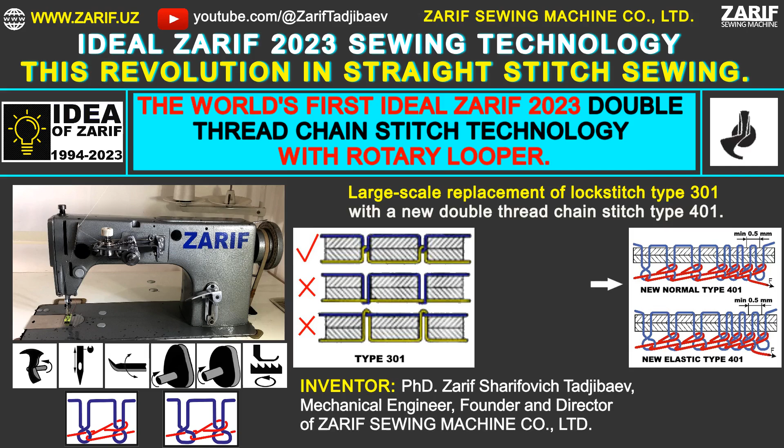This is a fundraising campaign to bring to market the Ideal Zarif 2023 year sewing technology, a revolution in straight stitch sewing. In 1994, we revolutionized sewing technology with the creation of the Zarif double thread chain stitch technology using a rotary looper. This breakthrough was officially recognized in 2000 with US patent number 6095069. It has taken us almost 26 years to perfect this innovative technology, making it the world's first ideal solution for sewing straight stitches. To achieve this, we first developed a prototype Zarif sewing machine based on our new technology in 1997.

We modified an industrial lockstitch sewing machine, Class 1022, from Orsha, Belarus, to carry out our initial trials. Through extensive testing, we identified areas for improvement and gradually improved the machine by applying our expertise. Finally, in 2023, we successfully created the world's first Ideal Zarif technology for straight stitch sewing.

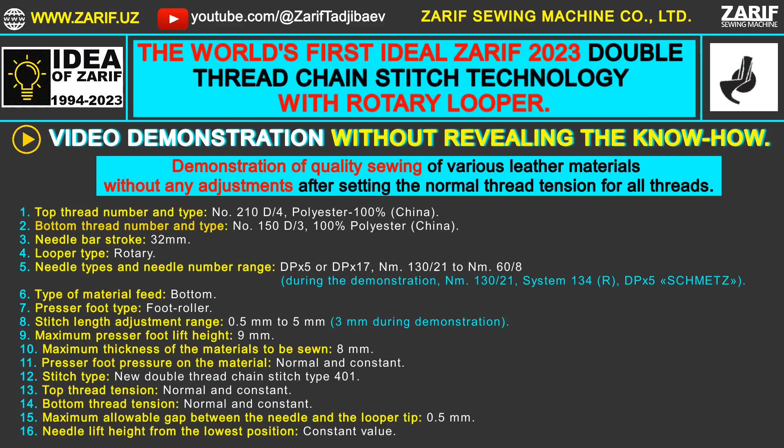Video demonstration without revealing the know-how. Demonstration of quality sewing of various leather materials, without any adjustments after setting the normal thread tension for all threads. Our prototype of the innovative Zarif double thread chain stitch sewing machine works on the basis of our Ideal Zarif 2023 year double thread chain stitch technology with a rotary looper.

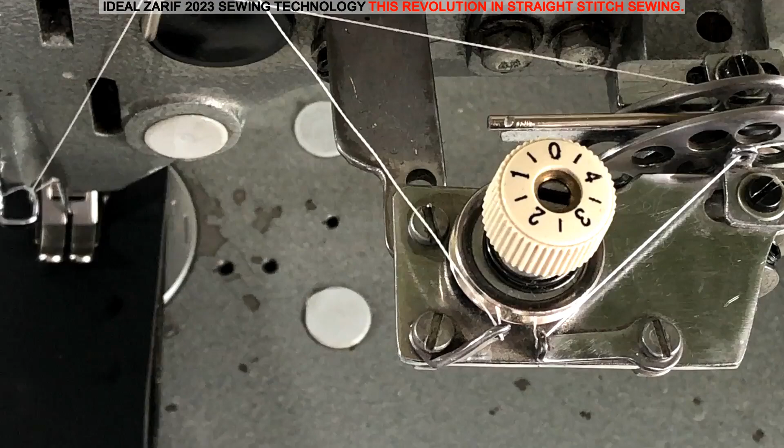For the sewing demonstration, we will be using sewing threads made in China. The main requirement is the absence of knots, as knots disrupt the stitch formation process since they cannot pass through the eye of the needle. During sewing, the top thread tensioner nut and the bottom thread tensioner nut, not shown, remain in a fixed position, ensuring the normal thread tension, neither too loose nor too tight.

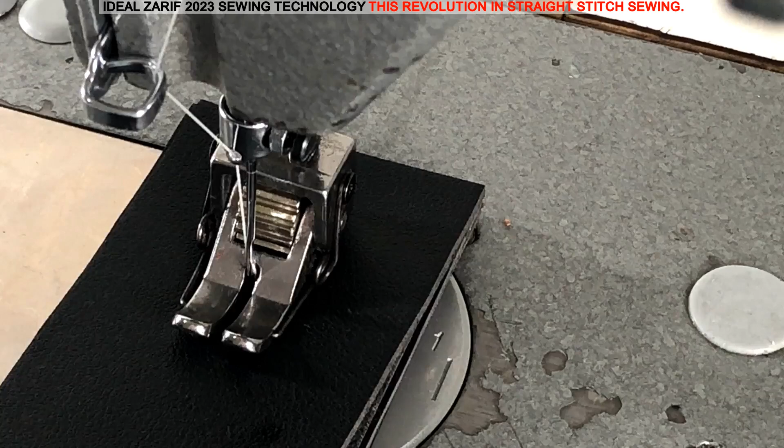In our Ideal Zarif 2023 year double thread chain stitch technology, the needle is not involved in pre-tightening the top thread loop from the previous stitch. As a result, for the first time ever, a double thread chain stitch sewing machine uses a needle with one long groove.

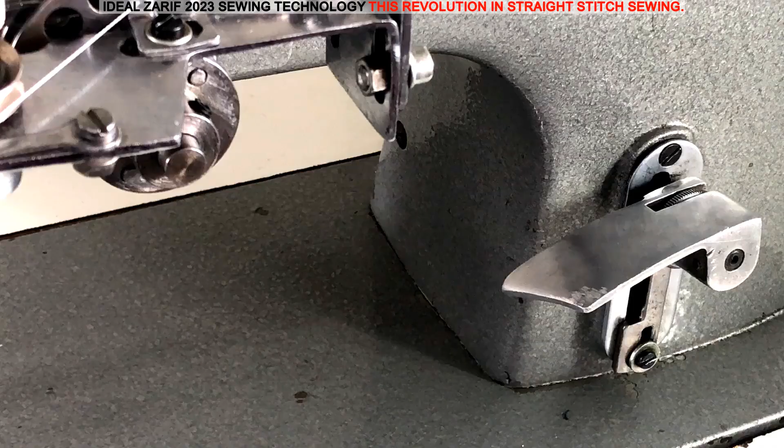This design offers greater resistance to bending compared to the double groove needle used in existing double thread and multi-thread chain stitch technologies. Thanks to our Ideal Zarif 2023 year sewing technology, it has become possible for the first time in the world to reduce the length of the double thread chain stitch to 0.5 mm. This allows for a more secure tacking of the chain stitch seam end and prevents unraveling due to condensed stitches at a stitch length of 0.5 mm.

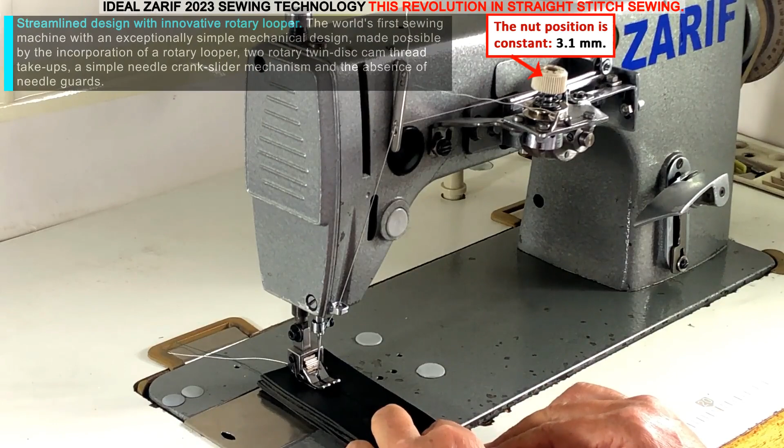Streamlined design with innovative rotary looper. The world's first sewing machine with an exceptionally simple mechanical design, made possible by the incorporation of a rotary looper, 2 rotary twin-disc cam thread take-ups, a simple needle crank slider mechanism and the absence of needle guards.

Revolutionary chain stitch look. This pioneering double-thread chain stitch sewing machine produces a new double-thread chain stitch type 401 in which the loops of the top and bottom threads are rotated 180 degrees. This innovative design makes the underside of the chain stitch look like a thick thread running along the seam, rather than a chain of threads, due to the use of a rotary looper.

One long groove needle for maximum strength. For the first time, a double thread chain stitch sewing machine uses a needle with one long groove to produce a double thread chain stitch type 401, which offers greater flexural strength than a needle with two long grooves used in existing double thread and multi-thread chain stitch technologies.

Advanced capabilities for sewing thick materials. This groundbreaking sewing machine can sew materials up to 8 mm thick with a short needle bar stroke of 32 mm, thanks to our know-how.

Breakthrough in needle stability for different materials. This revolutionary sewing machine can sew different materials without needle breakage and needle point deformation, achieved by the use of a rotary looper and a needle plate with a slot for the needle, coupled with the absence of needle guards.

Elimination of skipped stitches and unraveling. This pioneering sewing machine, thanks to our innovative design, can sew materials without a single skipped stitch, which is critical for chain stitch seams, as all types of chain stitch seams are prone to unraveling, both at the end of the seam if not securely tacked, and from the skipped stitch back to the beginning of the seam.

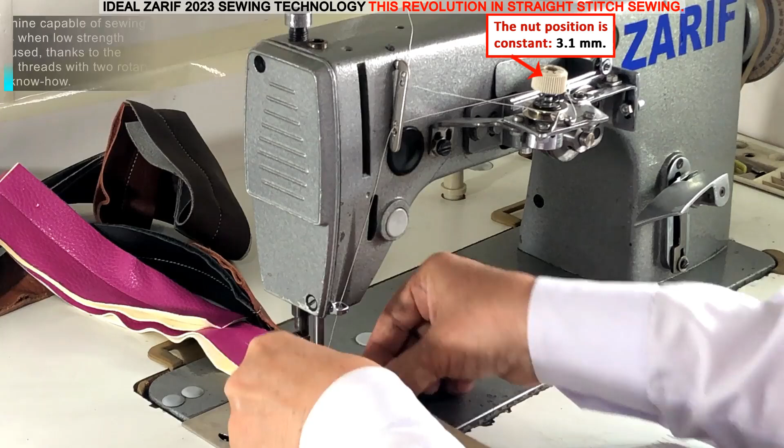No thread breaks. The first sewing machine capable of sewing through materials without thread breaks when low-strength threads and threads with knots are not used, thanks to the smooth tightening of the top and bottom threads with two rotary twin-disc cam thread take-ups and our know-how.

Easy changeover to different needle sizes. The first sewing machine to increase the maximum distance between the needle and the looper tip to 0.5 mm, making it easy to change from one needle size to another, from number 130 to #60, without having to adjust the looper in relation to the needle.

Secure tacking of the chain stitch seam end. The world's first double thread chain stitch sewing machine, thanks to our know-how, makes it possible to reduce the length of the chain stitch to 0.5 mm, thus making the end of the chain stitch seam more secure against unraveling by condensing the stitches with a stitch length of 0.5 mm.

High-quality chain stitch seams with no adjustments. For the first time in the world, we've used our know-how to achieve high-quality chain stitch seams without skipped stitches. All stitches are ideally tightened, regardless of the thickness, stiffness, or density of the material, simply by setting the normal thread tension for all threads, no further adjustments required.

A new look for the chain stitch underside. For the first time ever, the underside of a chain stitch seam looks like a thick thread running along the seam instead of a chain. This breakthrough is made possible by our new double thread chain stitch type 401, where the top thread and bottom thread loops are rotated 180 degrees.

Quality joining of different materials without adjustments. For the first time, our advanced technology allows quality joining of materials of different thicknesses, densities, and stiffnesses with chain stitch without any adjustments during the sewing process, simply by setting the normal thread tension for all threads, thanks to our know-how.

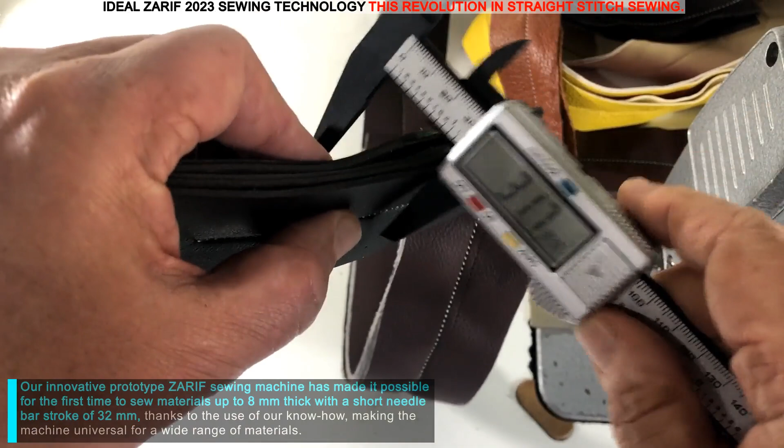Our innovative prototype Zarif sewing machine has made it possible for the first time to sew materials up to 8 mm thick with a short needle bar stroke of 32 mm, thanks to the use of our know-how, making the machine universal for a wide range of materials. This refers to the thickness of various cross-linked materials consisting of 2 or more layers in a compressed state.

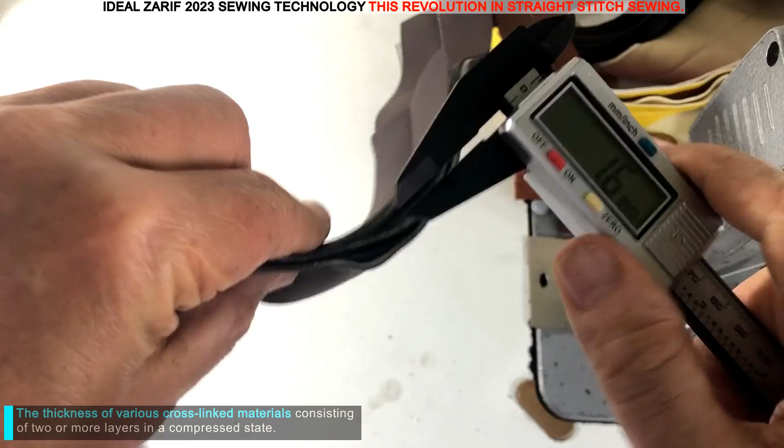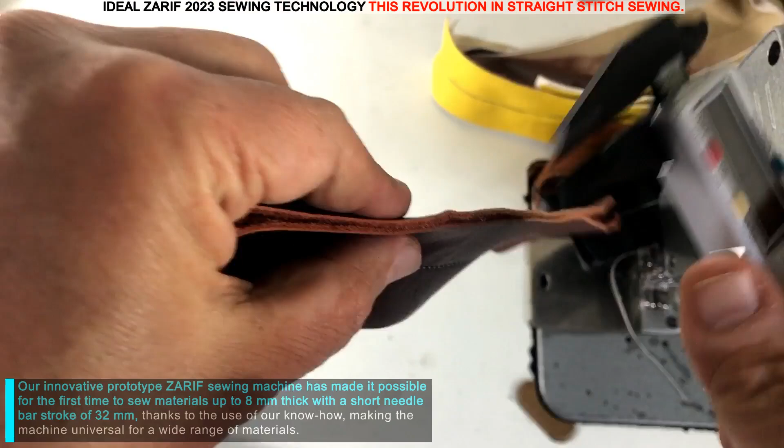Our innovative prototype Zarif sewing machine has made it possible for the first time to sew materials up to 8 mm thick with a short needle bar stroke of 32 mm, thanks to the use of our know-how, making the machine universal for a wide range of materials. This refers to the thickness of various cross-linked materials consisting of 2 or more layers in a compressed state.

Our innovative prototype Zarif sewing machine has made it possible for the first time to sew materials up to 8 mm thick with a short needle bar stroke of 32 mm, thanks to the use of our know-how, making the machine universal for a wide range of materials. This refers to the thickness of various cross-linked materials consisting of 2 or more layers in a compressed state.

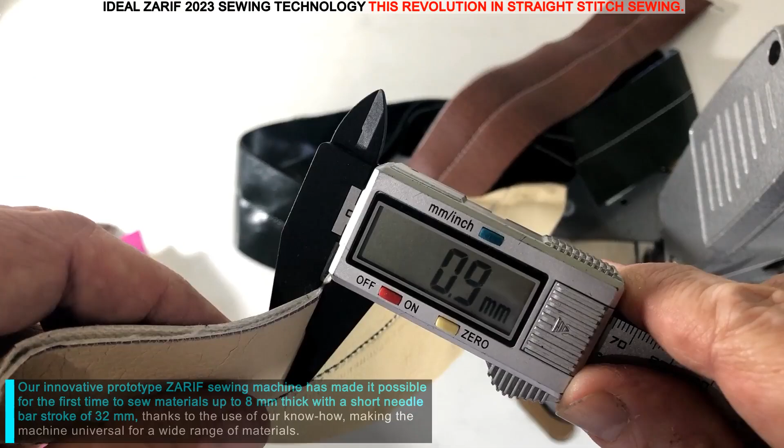Our innovative prototype Zarif sewing machine has made it possible for the first time to sew materials up to 8 mm thick with a short needle bar stroke of 32 mm, thanks to the use of our know-how, making the machine universal for a wide range of materials. This refers to the thickness of various cross-linked materials consisting of 2 or more layers in a compressed state.

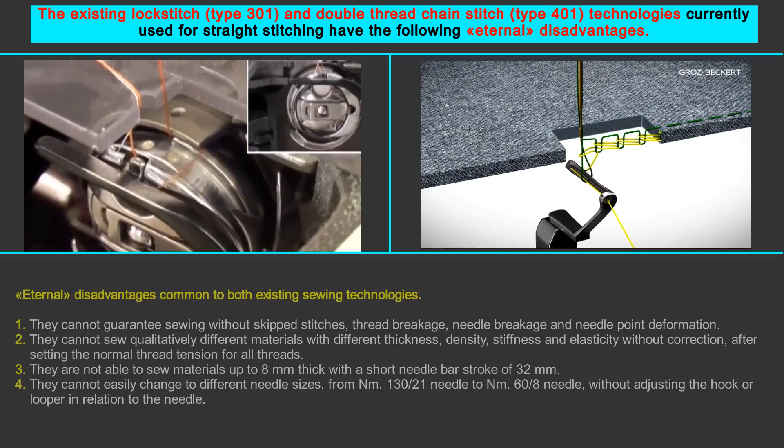The existing lock stitch, type 301, and double thread chain stitch, type 401, technologies currently used for straight stitching have the following eternal disadvantages, common to both existing sewing technologies.

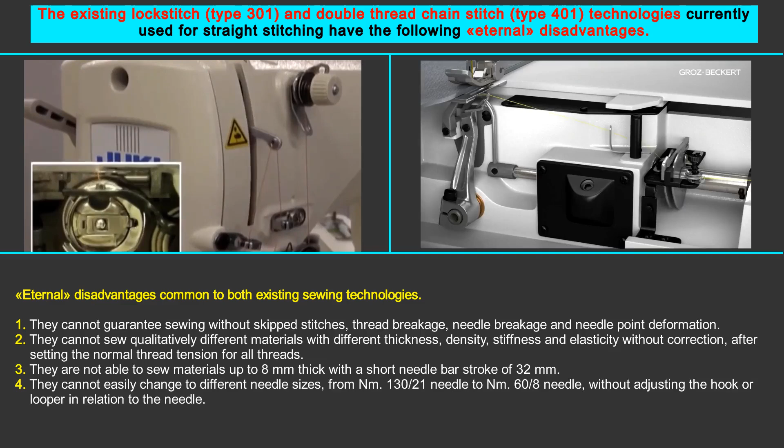They cannot guarantee sewing without skipped stitches, thread breakage, needle breakage and needle point deformation. They cannot sew qualitatively different materials with different thickness, density, stiffness and elasticity without correction, after setting normal thread tension for all threads. They are not able to sew materials up to 8 mm thick with a short needle bar stroke of 32 mm.

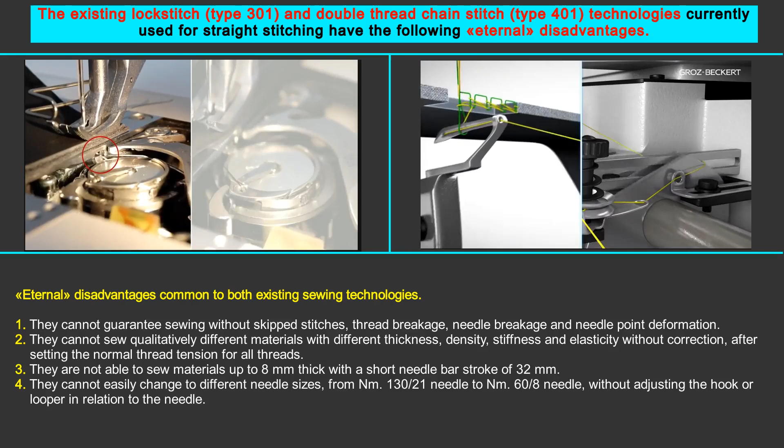They cannot easily change to different needle sizes, from number 130 needle to number 60 needle, without adjusting the hook or looper in relation to the needle.

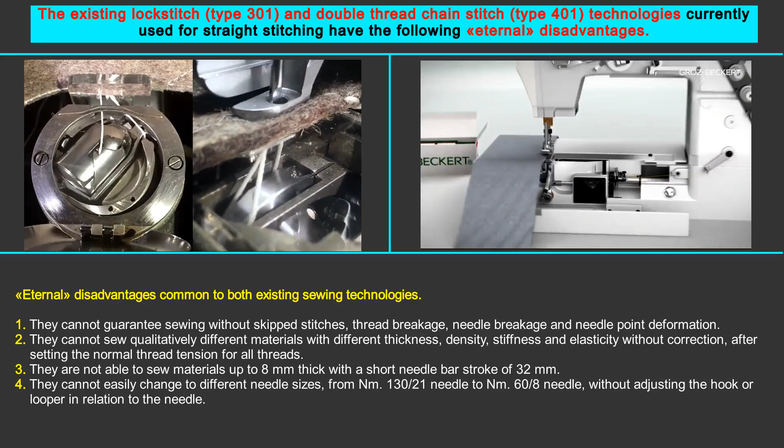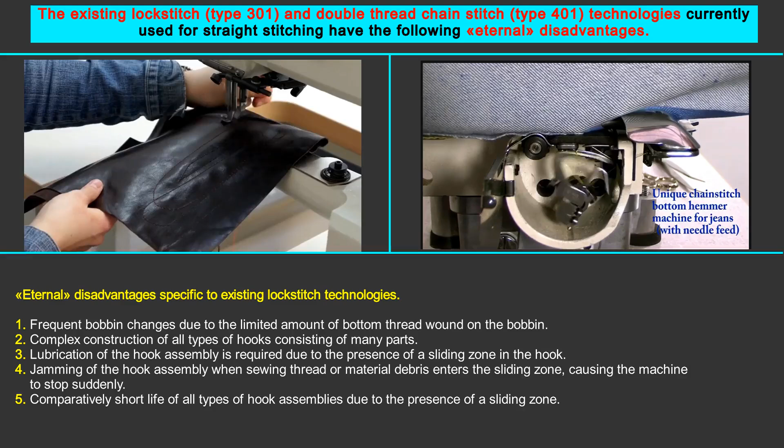Eternal disadvantages specific to existing lockstitch technologies: frequent bobbin changes due to the limited amount of bottom thread wound on the bobbin, and complex construction of all types of hooks consisting of many parts.

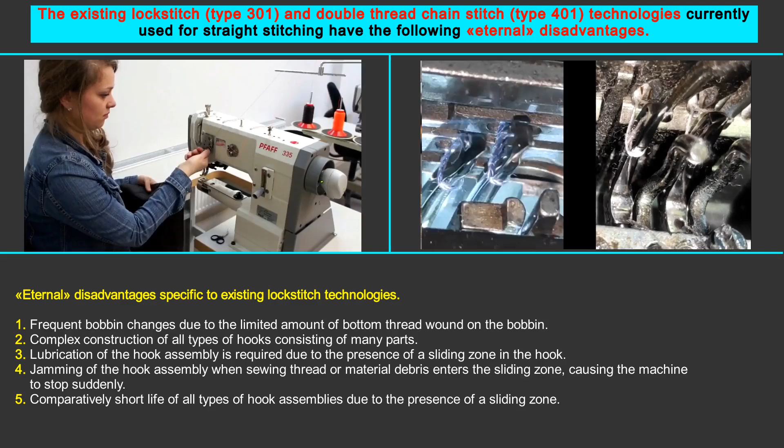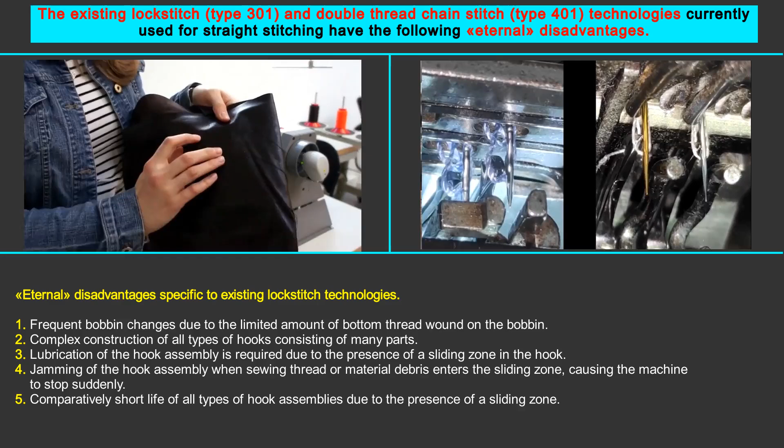Lubrication of the hook assembly is required due to the presence of a sliding zone in the hook. Jamming of the hook assembly occurs when sewing thread or material debris enters the sliding zone, causing the machine to stop suddenly. There is also a comparatively short life of all types of hook assemblies due to the presence of a sliding zone.

Eternal disadvantages specific to existing double thread chain stitch technologies, which use 3 types of looper with an eyelet at the top for bottom thread insertion.

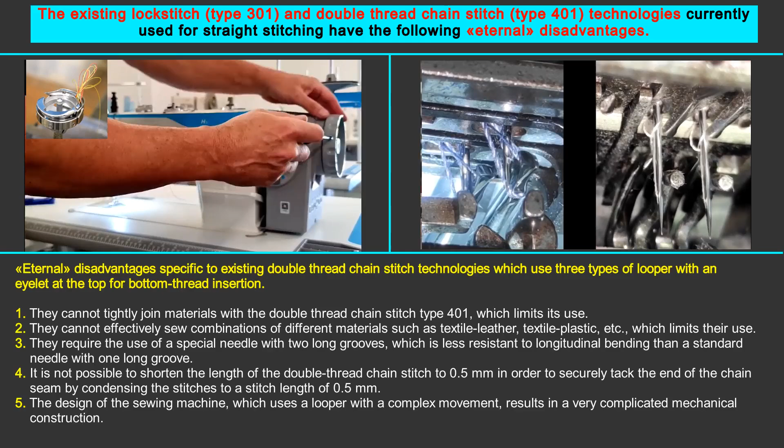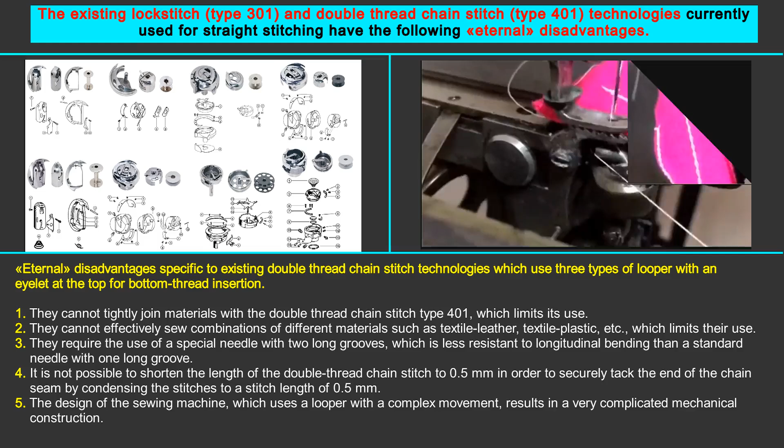They cannot tightly join materials with the double thread chain stitch type 401, which limits its use. They also cannot effectively sew combinations of different materials such as textile-leather, textile-plastic, etc., which limits their use.

They require the use of a special needle with 2 long grooves, which is less resistant to longitudinal bending than a standard needle with 1 long groove.

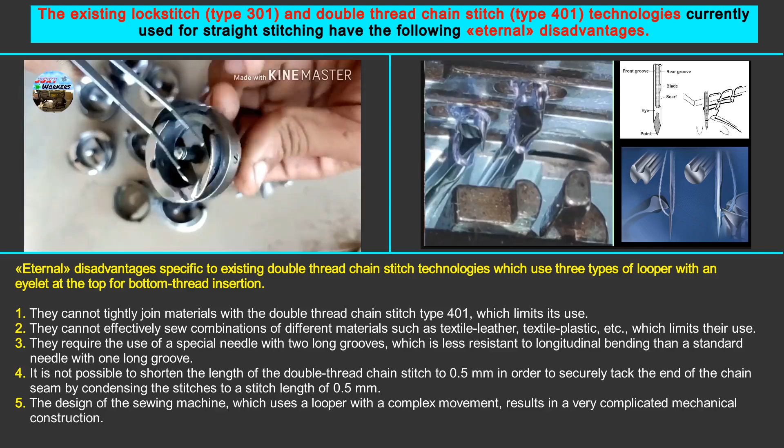It is not possible to shorten the length of the double thread chain stitch to 0.5 mm in order to securely tack the end of the chain seam by condensing the stitches to a stitch length of 0.5 mm.

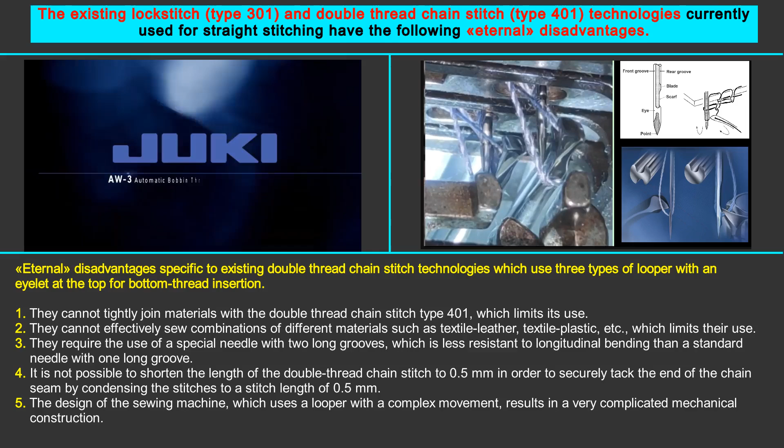The design of the sewing machine, which uses a looper with a complex movement, results in a very complicated mechanical construction.

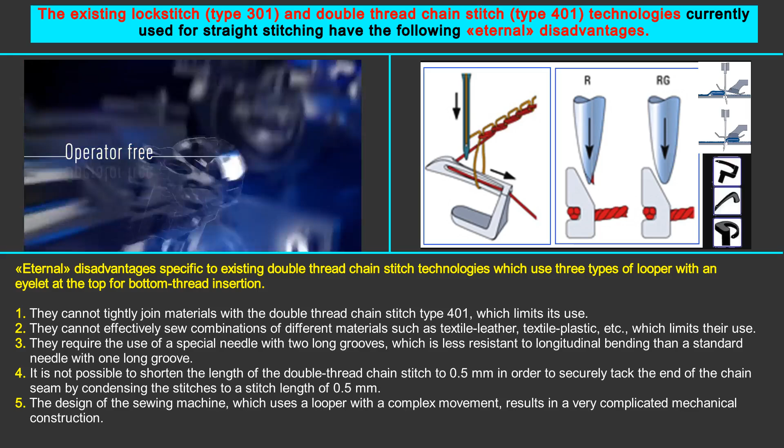Our ideal Zarif 2023 year double thread chain stitch technology has revolutionized sewing machine design and straight stitch sewing. For the first time, a rotary looper is used to form a double thread chain stitch, resulting in the world's first new double thread chain stitch type 401, where the top and bottom thread loops are rotated 180 degrees.

For the first time, an ordinary needle with a single long groove is used to form a double thread chain stitch, as the needle does not participate in the pre-tightening of the top thread loop placed in the previous stitch.

For the first time, materials up to 8 mm thick can be sewn with a needle bar stroke of 32 mm. For the first time, it is possible to sew materials of different thickness, density, stiffness and elasticity without any adjustments, by setting the normal tension for all threads.

For the first time, it is possible to sew without skipped stitches, thread breakage and needle point deformation, provided the thread is free of knots and the needle size matches the material being sewn.

For the first time, using our know-how, it is possible to tightly pull the top thread loop in a stitch to achieve a dense material join, or to loosely pull the top thread loop in a stitch to get smooth seams on light materials and elastic seams in stretchable materials, without adjusting normal thread tension.

For the first time, the maximum allowable gap between the needle and the tip of the looper has been increased to 0.5 mm, allowing an easy transition from a number 130 needle to a number 60 needle without adjusting the looper relative to the needle.

For the first time, high stitch formation reliability has been achieved without the use of needle guards.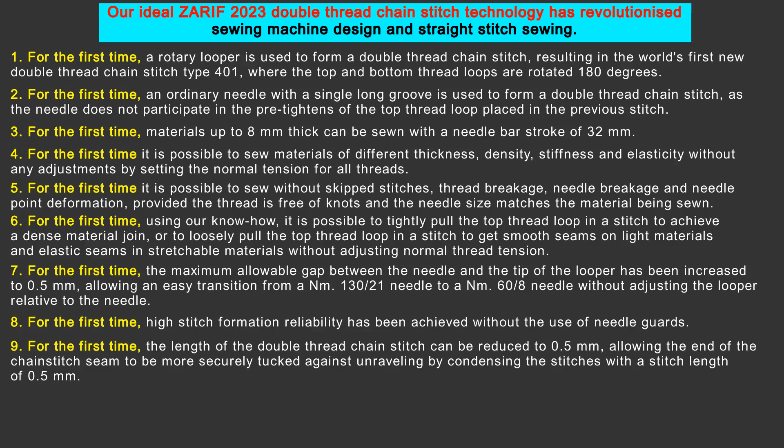For the first time, the length of the double thread chain stitch can be reduced to 0.5 mm, allowing the end of the chain stitch seam to be more securely tucked against unraveling by condensing the stitches with a stitch length of 0.5 mm. For the first time, it is possible to develop different types of sewing machines, with different types of platforms and different types of material feed.

This is achieved with a very simple mechanical design that operates with high reliability and long service life.

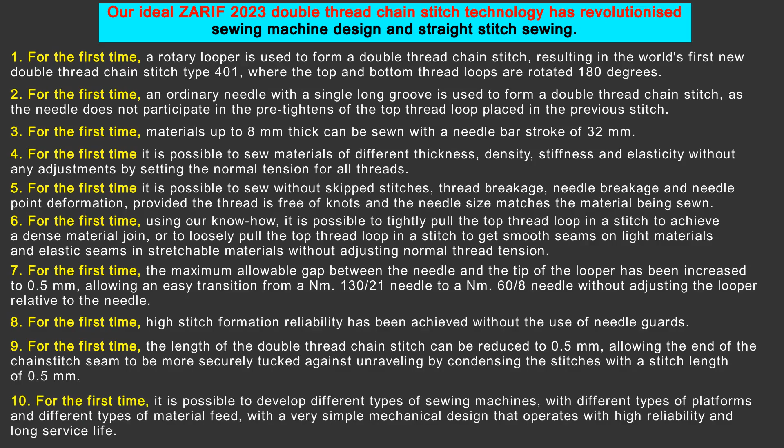History of Zarif double thread chain stitch technology with rotary looper: in 1994 we came up with the idea of creating a double thread chain stitch type 401 using a rotary looper. We applied for a patent for this new Zarif double thread chain stitch technology, and in 2000, US patent number 6095069 was granted.

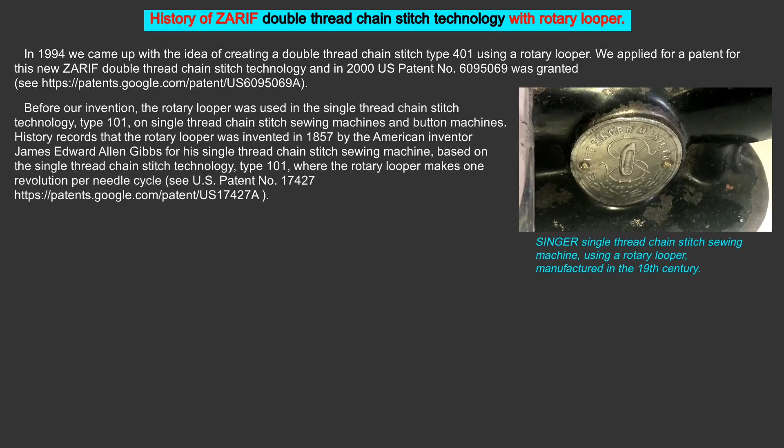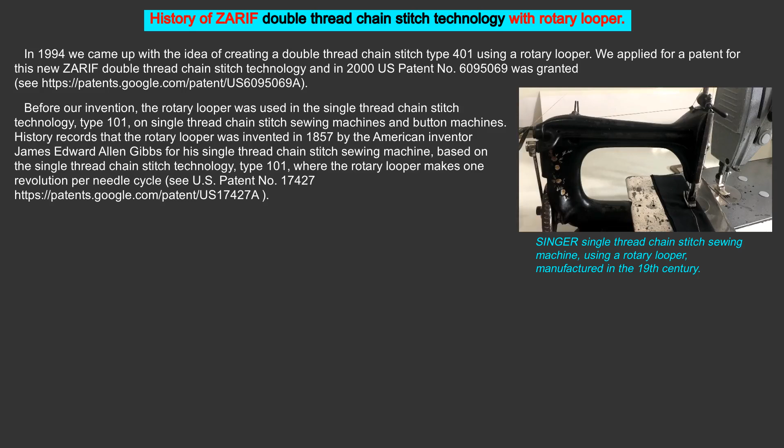Before our invention, the rotary looper was used in the single thread chain stitch technology, type 101, on single thread chain stitch sewing machines and button machines. History records that the rotary looper was invented in 1857 by American inventor James Edward Allen Gibbs for his single thread chain stitch sewing machine, based on the single thread chain stitch technology, type 101, where the rotary looper makes 1 revolution per needle cycle. See US patent number 17427.

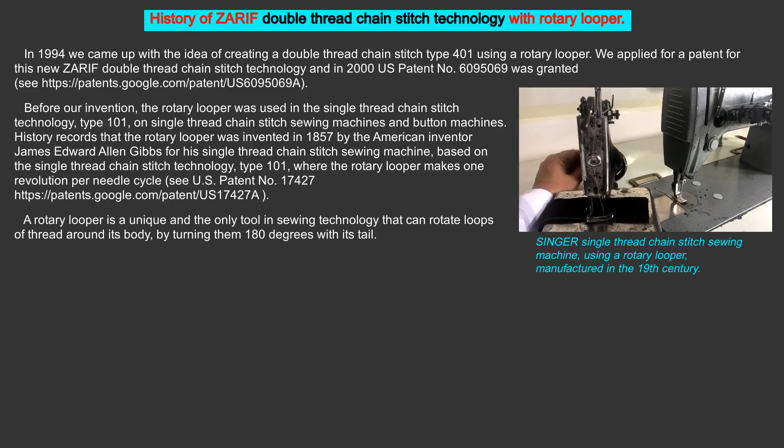A rotary looper is a unique and the only tool in sewing technology that can rotate loops of thread around its body by turning them 180 degrees with its tail. As is known, the rotary looper is made in one piece and has 3 zones: the head zone with a front tip to catch the thread and a rear tip to release the thread loop from the body of the looper, the tail zone for rotating the thread loop through 180 degrees, and the shaft zone for attaching the looper to the machine.

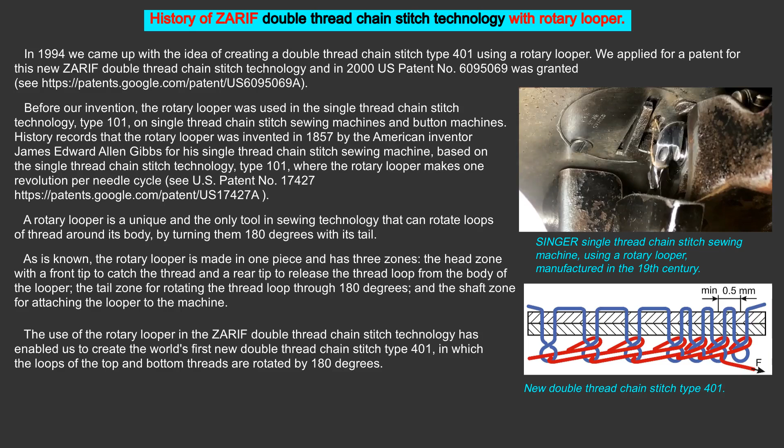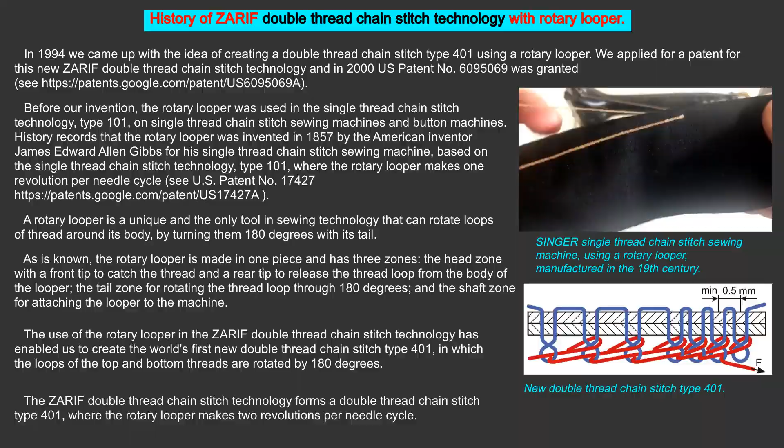The use of the rotary looper in the Zarif double thread chain stitch technology has enabled us to create the world's first new double thread chain stitch type 401, in which the loops of the top and bottom threads are rotated by 180 degrees. The Zarif double thread chain stitch technology forms a double thread chain stitch type 401, where the rotary looper makes 2 revolutions per needle cycle. Zarif double thread chain stitch technology with rotary looper, invented by us in 1994, see US patent number 6095069.

In the Zarif double thread chain stitch technology, the top thread is fed to the looper by a needle with a vertical reciprocating motion, as is usually done. To feed the bottom thread to the looper, a bottom thread pusher is used, which makes oscillating movements in the horizontal plane. Since the rotary looper can loop thread around its body in the form of a loop,

once the bottom thread, fed by the bottom thread pusher, is caught by the front tip of the looper, the top thread loop leaves the looper body and, as it tightens, forms a loop from the bottom thread which the looper can now wrap around its body. As the rotary looper only uses a small length of the thread loops and the thread loops are released from the rear tip of the looper, the thread loops can be tightened very smoothly.

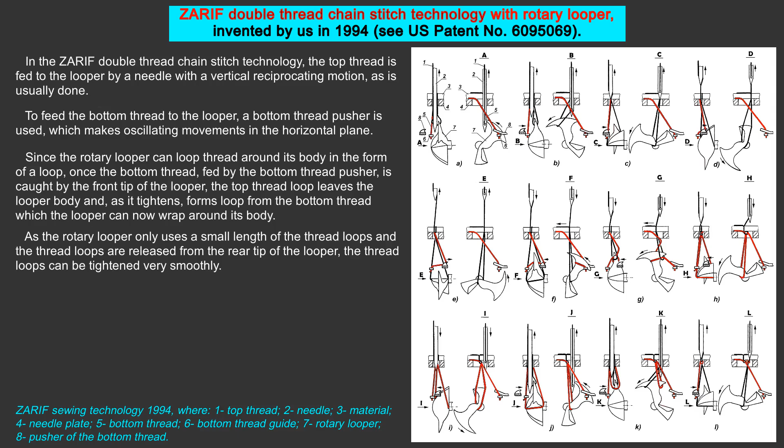Therefore, the Zarif double thread chain stitch technology uses 2 rotary twin disc cam thread take-ups to feed and tighten both the top and bottom threads, with each thread being controlled separately.

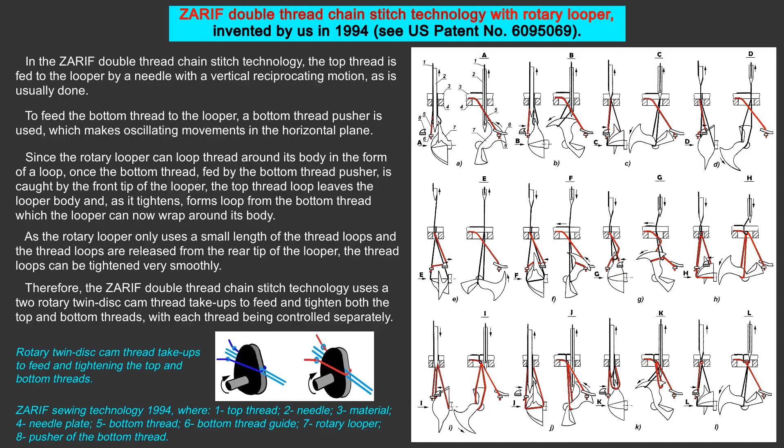History of the prototype development of the Zarif sewing machine based on Zarif double thread chain stitch technology with a rotary looper. In 1997, we decided to build a prototype sewing machine to test our new Zarif double thread chain stitch technology with a rotary looper, which we had invented in 1994. We chose a Class 1022 lockstitch industrial sewing machine from the Belarusian company Orsha because it was widely used in Uzbekistan at the time and was relatively affordable. The machine had a needle bar stroke of 32 mm and was designed to sew fabrics of medium thickness.

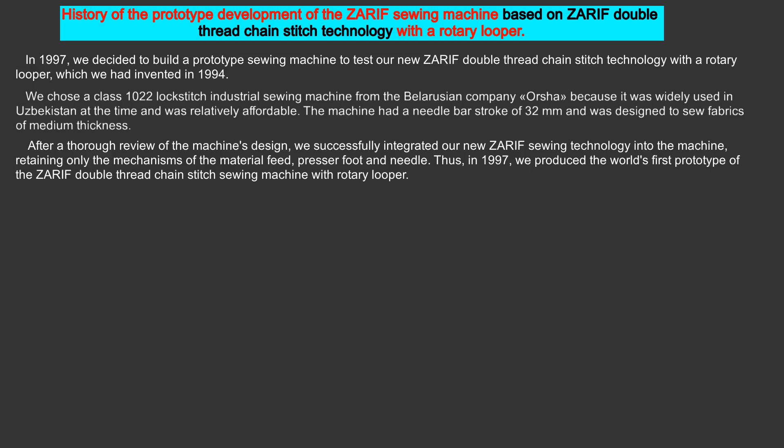After a thorough review of the machine's design, we successfully integrated our new Zarif sewing technology into the machine, retaining only the mechanisms of the material feed, presser foot, and needle. Thus, in 1997, we produced the world's first prototype of the Zarif double thread chain stitch sewing machine with rotary looper. Trials on the prototype Zarif sewing machine allowed us to identify some of the shortcomings of our new Zarif double thread chain stitch technology developed in 1994.

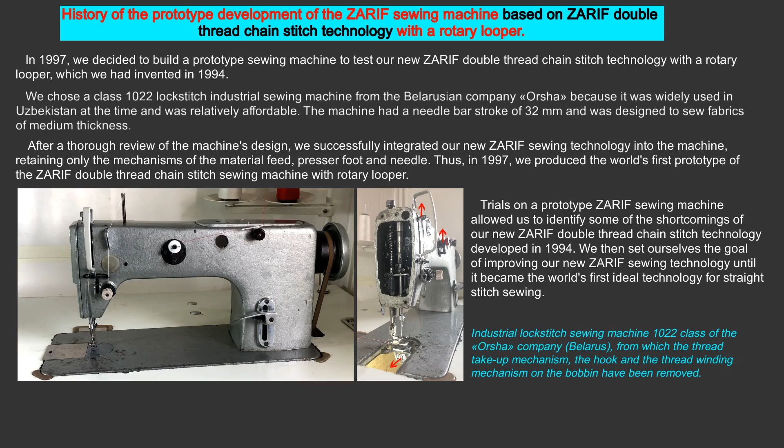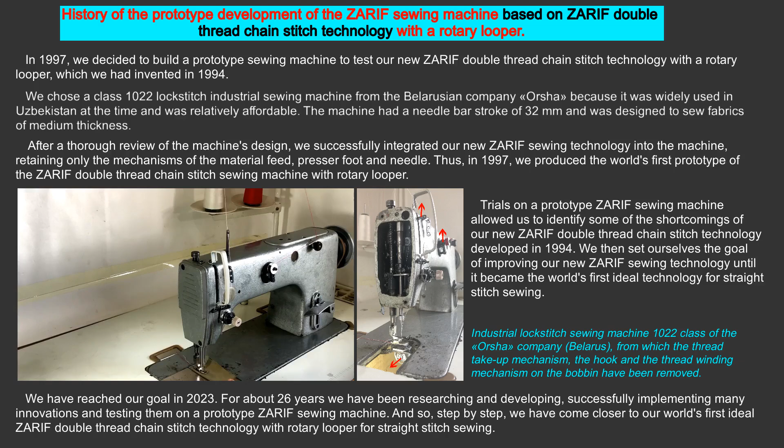We then set ourselves the goal of improving our new Zarif sewing technology until it became the world's first ideal technology for straight stitch sewing. We have reached our goal in 2023. For about 26 years we have been researching and developing, successfully implementing many innovations and testing them on a prototype Zarif sewing machine. And so, step by step, we have come closer to our world's first ideal Zarif double thread chain stitch technology with rotary looper for straight stitch sewing.

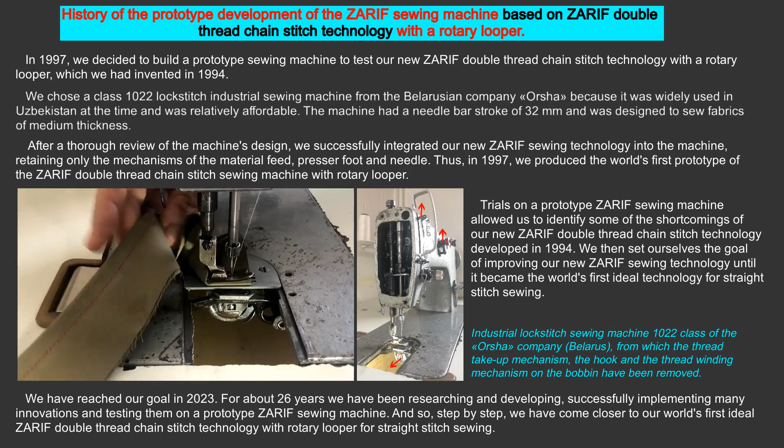Stitch type, working units, and technical specifications of the prototype Zarif sewing machine, based on the ideal Zarif 2023 year double thread chain stitch technology with rotary looper.

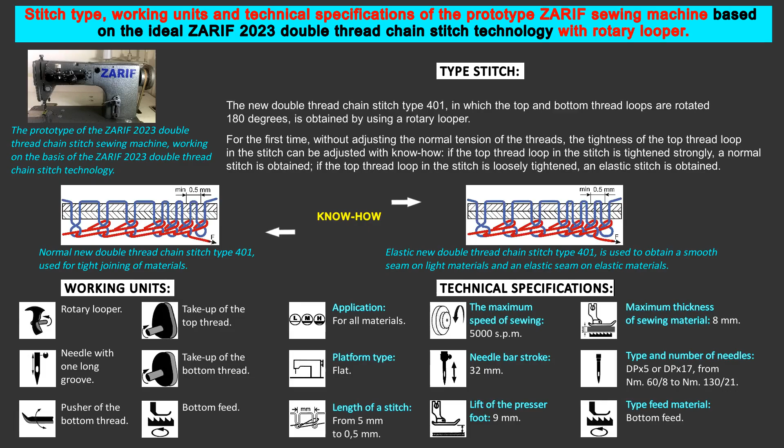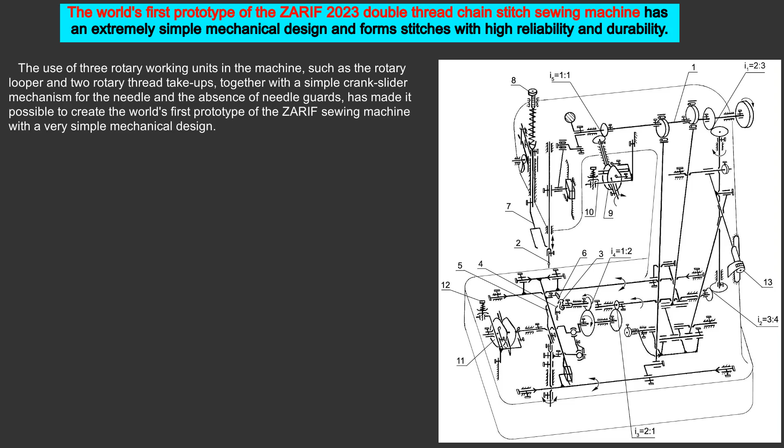The world's first prototype of the Zarif 2023 year double thread chain stitch sewing machine has an extremely simple mechanical design and forms stitches with high reliability and durability. The use of 3 rotary working units in the machine, such as the rotary looper and 2 rotary thread take-ups, together with a simple crank slider mechanism for the needle and the absence of needle guards, has made it possible to create the world's first prototype of the Zarif sewing machine with a very simple mechanical design.

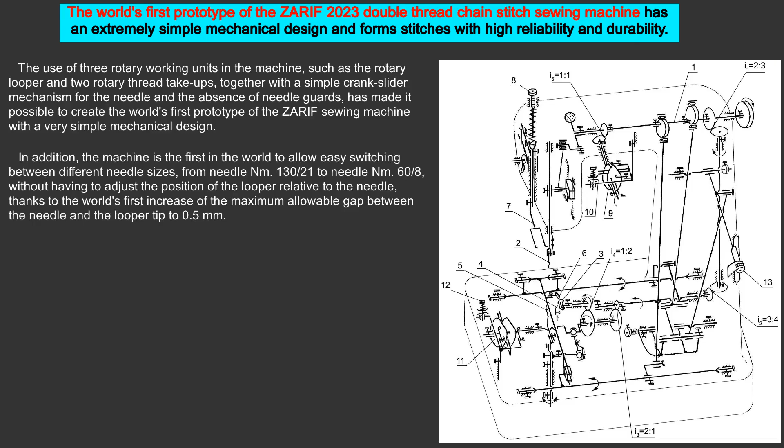In addition, the machine is the first in the world to allow easy switching between different needle sizes, from needle number 130 to needle number 60, without having to adjust the position of the looper relative to the needle, thanks to the world's first increase of the maximum allowable gap between the needle and the looper tip to 0.5 mm.

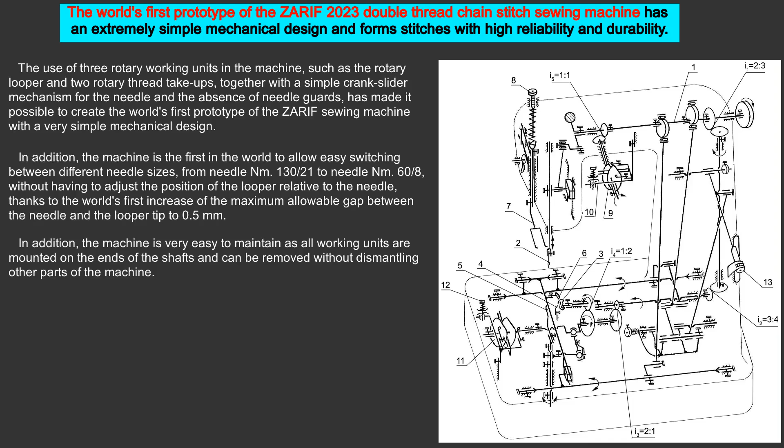In addition, the machine is very easy to maintain, as all working units are mounted on the ends of the shafts and can be removed without dismantling other parts of the machine. Kinematic diagram of the prototype Zarif 2023 year double thread chain stitch sewing machine.

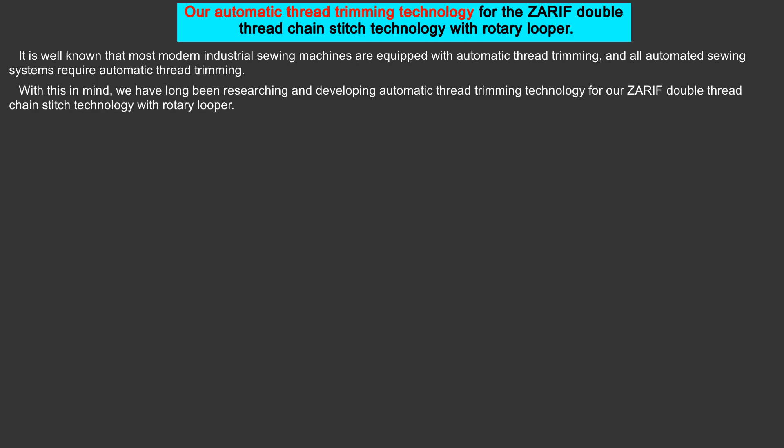Our automatic thread trimming technology for the Zarif double thread chain stitch technology with rotary looper. It is well known that most modern industrial sewing machines are equipped with automatic thread trimming, and all automated sewing systems require automatic thread trimming. With this in mind, we have long been researching and developing automatic thread trimming technology for our Zarif double thread chain stitch technology with rotary looper.

Thanks to these efforts, we successfully invented the automatic thread trimming technology for our Zarif double thread chain stitch technology with rotary looper in 2020, and further improved it in 2021 and 2023. The advanced version of our automatic thread trimming technology, which we invented in 2023, has not yet been physically manufactured to ensure its practical functionality. However, the drawings of our automatic thread trimming technology prove that it works in theory.

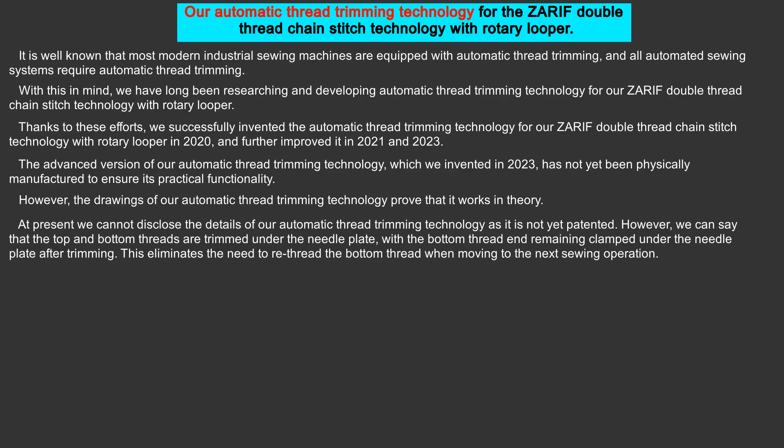At present we cannot disclose the details of our automatic thread trimming technology as it is not yet patented. However, we can say that the top and bottom threads are trimmed under the needle plate, with the bottom thread end remaining clamped under the needle plate after trimming. This eliminates the need to rethread the bottom thread when moving to the next sewing operation.

If the sewing process is finished with condensed stitches of 0.5 mm stitch length and manual thread trimming, the resulting chain stitch seam will be difficult to unravel from the end of the seam. If the sewing process is finished with condensation stitches at a stitch length of 0.5 mm and with automatic thread trimming, the resulting chain stitch seam cannot be unraveled from the end of the seam, as the end of the top thread passes through the last loop of the bottom thread.

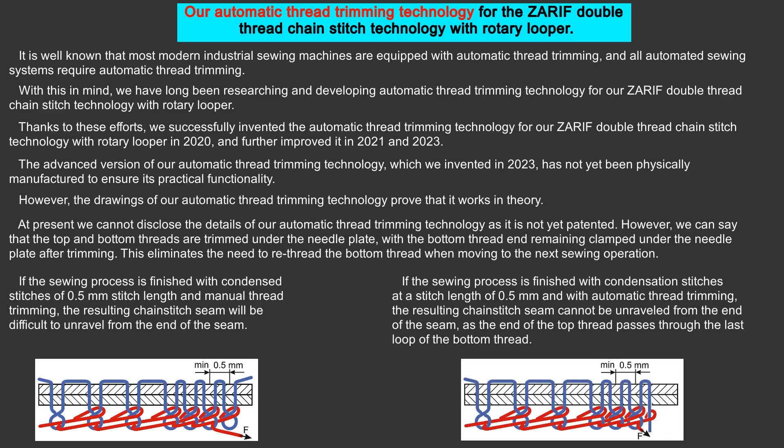Our ideal Zarif 2023 year double thread chain stitch technology with rotary looper opens a new era in the development of automated straight stitch sewing. It is well known that the future of mass production in various sewing industries is closely linked to automation, and the automation of sewing processes plays an important role in this transformation.

Currently, some sewing operations are already being automated using robotic manipulator-controlled sewing systems. In the future, these robotic manipulators may be replaced by more advanced humanoid robots. When it comes to automated sewing, it is essential that the process is performed to a high standard, ensuring that there are no skipped stitches, thread breakage, needle breakage and deformation of the needle point. Efficient sewing of different materials without the need for adjustments is also critical to the automation of the sewing process.

Our ideal Zarif 2023 year double thread chain stitch technology with rotary looper for straight stitch sewing is the perfect solution to meet all these requirements. Our prototype Zarif sewing machine has proven this in practice, but only when the material is fed in one direction. This allows us to create different automatic sewing systems based on this technology, where the material is fed in a single direction. However, there are many sewing operations where the stitch must follow a complex path.

In such cases, stitch formation must be independent of the material feed direction. With this in mind, we have been working for a long time to develop a device that would allow our Zarif double thread chain stitch technology with rotary looper to produce stitches regardless of the direction of material feed.

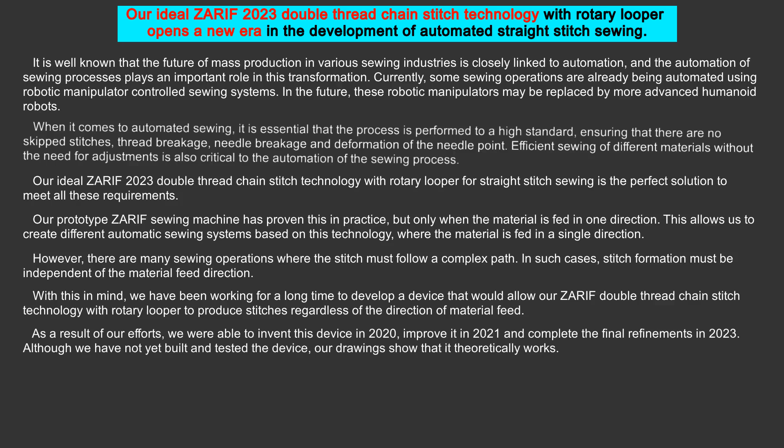As a result of our efforts, we were able to invent this device in 2020, improve it in 2021, and complete the final refinements in 2023. Although we have not yet built and tested the device, our drawings show that it theoretically works.

Patent protection for our inventions that we invented in 2023. We intend to secure patents in several countries around the world for all our inventions developed in 2023, including the ideal Zarif double thread chain stitch technology with rotary looper, automatic thread trimming technology, and the device that allows stitch formation with material feed in any direction.

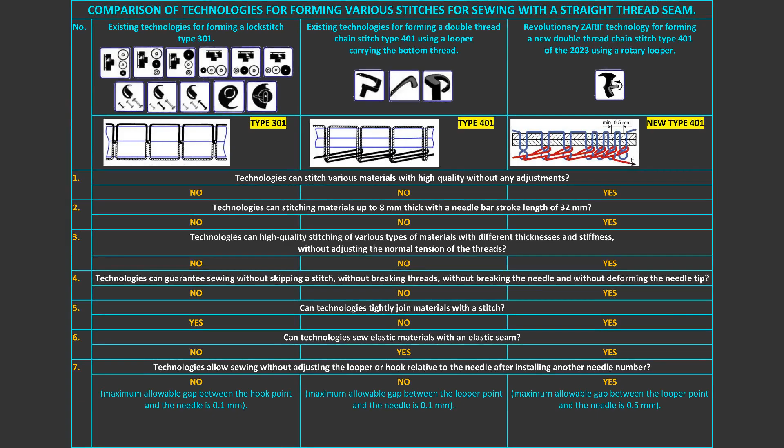Advantages and disadvantages of lockstitch type 301 and double thread chain stitch type 401. Comparison of technologies for forming various stitches for sewing with a straight seam.

Application of the revolutionary ideal Zarif 2023 year double thread chain stitch technology with a rotary looper that forms stitches in only one direction. Our prototype Zarif sewing machine, based on this technology, has proven its ability to perform straight stitching with material feed in only one direction and a stitch length ranging from 0.5 mm to 5 mm. In addition, we have developed a technical solution that allows the stitch length to be increased to 10 mm.

Based on our ideal Zarif 2023 year double thread chain stitch technology, which forms stitches in only one direction, the following machines can be designed and manufactured: various industrial sewing machines with different types of platforms and material feed mechanisms, various automated sewing systems with material feed in one direction only, and a range of programmable automatic pattern sewing machines with a 360 degrees rotating head that can feed material in any direction to create complex stitch patterns.

Application of the revolutionary ideal Zarif 2023 year double thread chain stitch technology with a rotary looper, forming stitches in any direction. If the device we invented in 2023, which enables this technology to form stitches with material feed in any direction, works successfully in practice, the following automated machines can be designed and manufactured on the basis of it, enabling the production of complex stitch patterns.

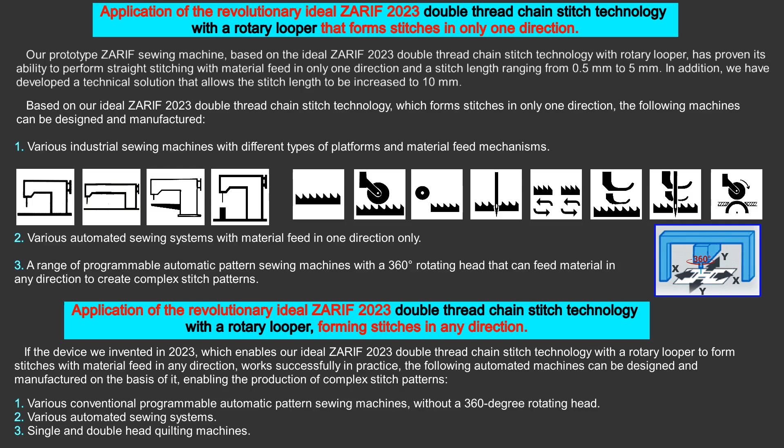Can our revolutionary ideal Zarif 2023 year double thread chain stitch technology with a rotary looper become obsolete in the future? We are confident that this will not happen. Our confidence is based on the following undeniable facts.

The eternal disadvantages of the existing sewing technologies currently used for straight stitch sewing, such as the lockstitch type 301 and the double thread chain stitch type 401, prevent them from becoming the ideal solution for straight stitch sewing, no matter how much they evolve in the future.

Furthermore, the invention of an ideal straight stitch sewing technology can only be achieved by creating a new double thread chain stitch technology that eliminates the eternal disadvantages of existing sewing technologies. Since it is technically impossible to invent an ideal straight stitch sewing technology by developing a new lockstitch technology without using a hook, the task of inventing a new double thread chain stitch technology and making it the ideal solution for straight stitch sewing is a very challenging one.

All previous attempts to invent a new double thread chain stitch technology and make it the ideal solution for straight stitch sewing were unsuccessful. For example, the new double thread chain stitch technology using a special hook, see US patent number 3811392, 1974, was never commercialized. We believe that any new double thread chain stitch technology using a special hook cannot become an ideal solution for sewing due to the complexity of the special hook design and the need for lubrication.

We were the first in the world to invent the new Zarif double thread chain stitch technology with rotary looper in 1994, which was granted US patent number 6095069 in 2000. It took us about 26 years to make this new Zarif sewing technology the world's first ideal straight stitch sewing technology.